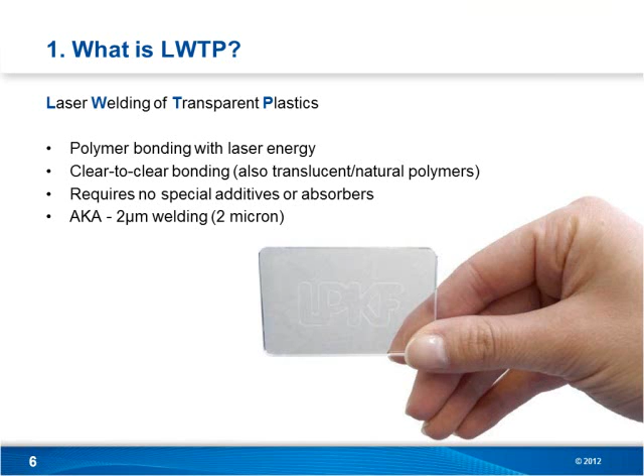So you might also hear us refer to this form of laser welding as 2-micron welding. That has to do with the wavelength of the laser. It's a higher wavelength. Or you could hear us refer to it as laser welding of transparent plastics. So there's a few names going around, just industry lingo, as this new technology kind of finds its traction in the industry.

In comparison, today we're talking about LWTP. In the past, though, you may have heard of through transmission laser welding. The real difference is in the wavelength of the lasers. As you can see, through transmission laser welding typically deals with near IR lasers between 800 nanometers and 1064. As we get into this new type of laser welding of transparent plastics, we're looking at higher wavelength lasers, sometimes double the wavelength, up to 1500 nanometers through to 2000 nanometers.

So again, 2000 nanometers, that's 2 micron, and that's the correlation, that's where you'll hear us say 2 micron. You might hear Tony say fiber lasers, that's what we're talking about, it's all the same. Again, the big difference here is that we're doing this without absorbers.

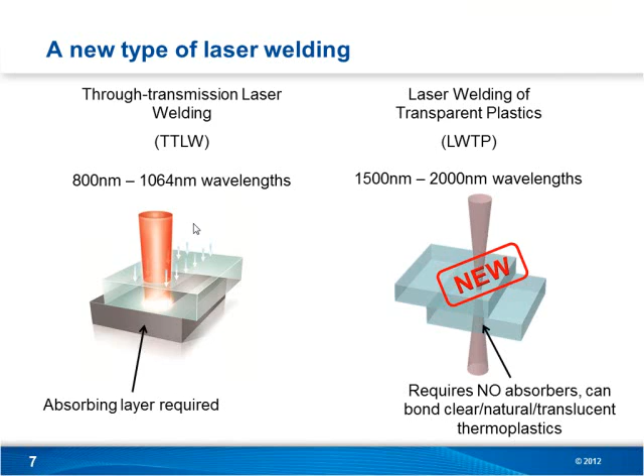What we're talking about today, however, is we're looking for a little bit more inherent absorption of the laser.

So the plastic is still in its natural state, but we want to have the ability to absorb some of that laser radiation into the plastic. Once you get up above 1500 nanometers, the laser wavelength starts to react differently to the thermoplastic.

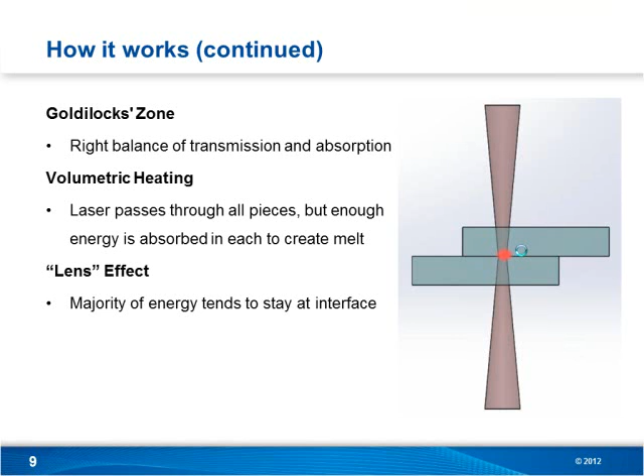So what do you need in order to make this happen? Well, like we mentioned before, we need a laser with wavelengths greater than 1500 nanometers. Typically, and Tony will attest to this, we're going to see lasers more around the range of 1900 nanometers. That being said, you saw the chart—we can play with wavelengths. Anything above 1500 though, and we're going to get the absorption that we need to weld plastics without additives.

Also, we need two or more clear pieces of plastic. The reason I say or more is because we have the option to bond more than one layer with this method. You'll see some pretty cool pictures, especially one that Tony's done down at IPG. I'll let him talk about that though.

Now, I want to clarify something. When I say clear, I might say clear, natural, translucent, or transparent—any of those will work. Most thermoplastics in their natural state are going to be clear or translucent, but there are some plastics like PBTs or nylons that even in their natural state have a milky or cloudy color. That still applies to the technology we're talking about today. That means the plastics don't have to be perfectly clear, just in their natural state.

We also need clamping force and material compatibility. So if we're welding two dissimilar pieces of plastic, we need the melt temperatures of the two pieces of plastic to overlap somewhat. They also need to have similar surface energies and similar chemical makeups.

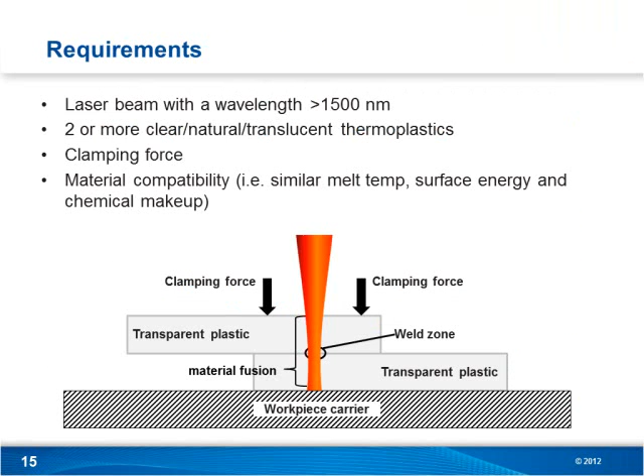We're controlling the laser beam with two galvo scanning mirrors for the most part. This is how Tony would be doing it in his lab down in California, and this is how we would do it in the lab we have set up at our German headquarters in Garbsen. Basically the laser beam is controlled with a galvo scanning mirror, so we can set up contours in software. The software pushes the information to a PLC, which controls the mirrors, and we can drive the beam in an XY motion pretty flexibly.

Typical travel speeds, we're seeing 20 to 80 millimeters per second as working travel speeds, but different than through transmission laser welding, where a lot of times we're making multiple passes. Here we're usually making a single pass, maybe 2 or 3 at the most. For the most part, a single pass can usually handle what we're looking for. So even though the travel speed might be slightly slower than regular through transmission laser welding, because we're only making 1 or 2 passes, it's still a very fast process and absolutely adequate for production.

Yeah, you're quite right, it is material dependent to a certain extent. Sometimes 1 pass is fine, other times you might need to heat it up rather more slowly with 2 or even 3 passes.

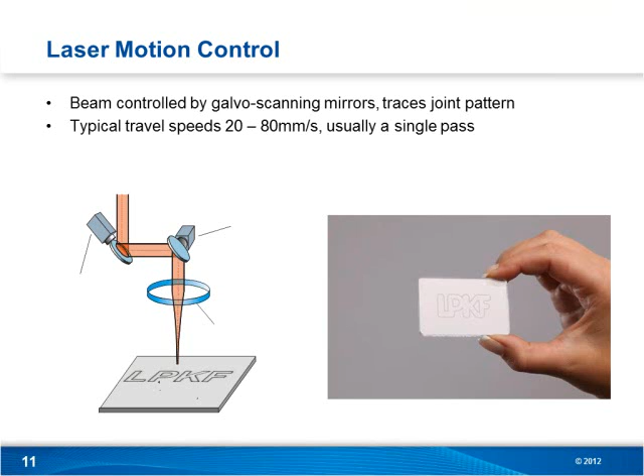So why is this a big deal? Why are we even talking about this today? And what are the influences going to be for you guys, for the industry, etc.?

So really the big difference here is that we can now weld plastics without any absorbers. When I say absorbers, I'm talking about whether that's an absorber like Clearweld that allows the plastic to remain clear, or if you're talking about adding pigmentations like carbon black to the lower layer. If you're familiar with regular through transmission laser welding, commonly the lower layer had to be black or of a darker color, which allowed the laser to be absorbed into that part. That being said, we don't have to have that anymore. Now we can weld 2 plastics without these absorbers. So this opens up possibilities for new laser entry, new joint designs, and also for color combinations.

Beyond that, we can do multi-layer applications with films. And it doesn't even have to be films. We've done hard to soft, we can do hard to soft to hard, and you'll see a few examples of that here in a minute.

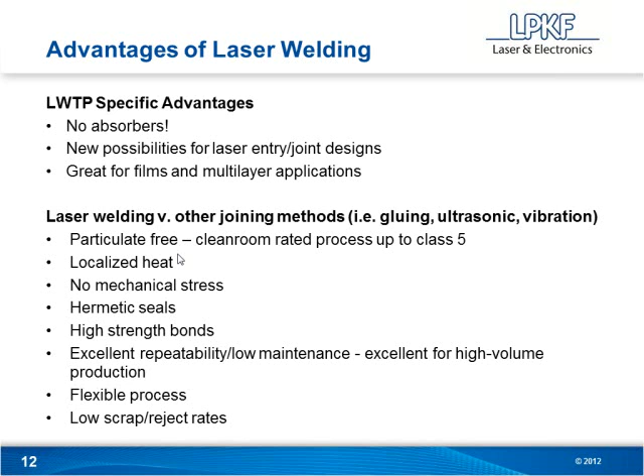Just really quickly too, the laser welding family, which is laser welding of transparent plastics, LWTP or 2 micron, like you've heard us say, that all falls under the laser welding family. Those all share these advantages: particulate free, it's great for clean room environments; localized heat, we're really only applying heat where it needs to be, and we can do this very precisely. Opposed to ultrasonic welding or vibration welding, we're not going to be stressing the parts too much. And on down the list, there's a lot of advantages to laser plastic welding, and those all still apply with LWTP laser welding as well.

So the big deal about no absorbers: one, specialized absorbers can be very expensive. Obviously, if you dope them into the plastic, they're going to be more expensive, but if you apply them locally at the joint, which we see a lot in production before this technology existed, it's difficult to apply and it can cost a lot to figure out how to do that. So now that we don't require these absorbers anymore, the cost of welding 2 clear pieces of plastic is going to be significantly cheaper.

And then also on top of that, even though these absorbers allowed the plastic to remain clear, they still had some effect—you would see this greening effect of the plastic, it wasn't completely clear. But I think for the medical industry and the biotech industry, the big one is going to be the FDA certification process. No longer will you have to push through another additive or another material to the FDA. Now you're just saying, hey, we're welding 2 pieces of clear polycarbonate together. We're not adding some obscure special chemical that no one's ever heard of that has to go through this process. So this is huge from a standpoint of simplifying the certification process as you pass medical devices into the FDA certification program.

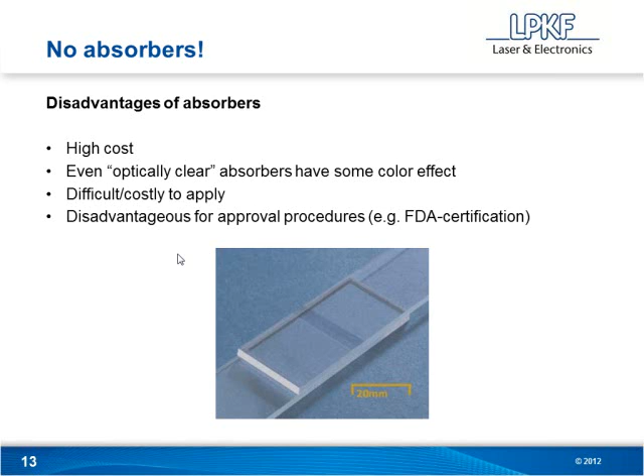Kind of leads us into my next topic here, which is industries. The big ones that we see are medical, biotech, and consumer. That being said, there's going to be applications outside of these as well, but the one that we're really excited about is medical, and obviously biotech is a subset there.

You'll see applications like microfluidic devices, as you can see here on the bottom. Very small channels require precise welds. Well, we can do this now, again, without having to add any specialized absorbers. Catheters and tubing situations - Tony's even been playing around with welding, making butt welds, which is a pretty important improvement, and we'll talk about that a little bit later too.

And then bags and connectors, and then you see the biotech in regards to that, flasks and cell cultures. So in consumer, we feel like it'll catch up eventually. There's a lot of potential here, mostly for aesthetics and design elements, playing with different color combinations, allowing us new joint entries, etc.

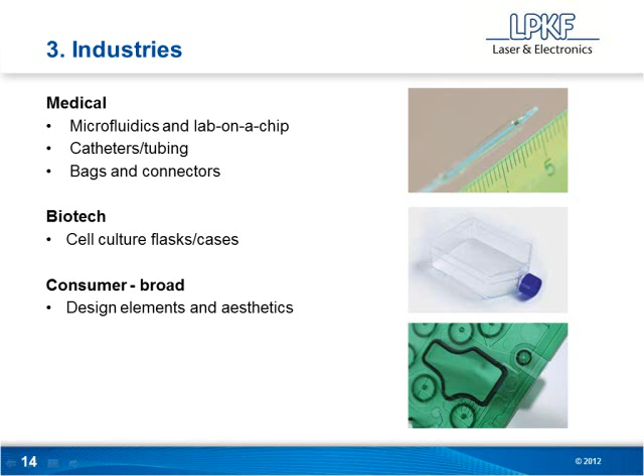So notable materials - we're going to kind of jump into the materials section and applications. I might go back and forth a little bit, but these are notable materials for LWTP, and again, this is not all of them, just the ones that we've seen have the most traction so far. A lot of these you see in the medical industry: polycarbonates, acrylics, COPs, COCs, and then obviously flexible materials like TPUs and TPEs. We're seeing a lot of applications with those.

Tony, have you ever seen any plastics to add to this list as far as popular plastics? No, I think you've pretty much covered the main groups there. I think obviously as the polymers become co-polymerized, there are many different mixtures of polymers, and there are requirements to substitute for PVC and for polycarbonate. We're seeing lots of blends of different polymers that are all really quite weldable as well, apart from the basic groups that you have on the list there, Josh.

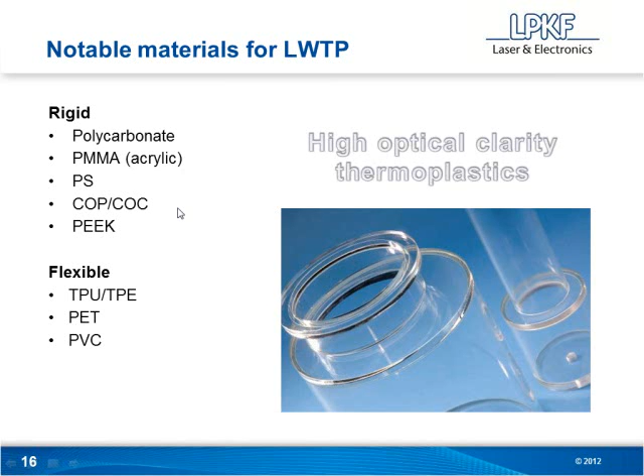So let's jump into a few applications, and these are just different material combinations that we've put together. A lot of these we're really just testing. Some of these took place in our lab in Germany, and Tony will show you some applications and materials he's welded in his lab down in Santa Clara. In this case, we have just 2 PMMA foils, pretty thin, 250 micron thickness, and I have a little animation here. Again, you just get that volumetric heating through the part, so the weld zone's actually taking place throughout both pieces of plastic.

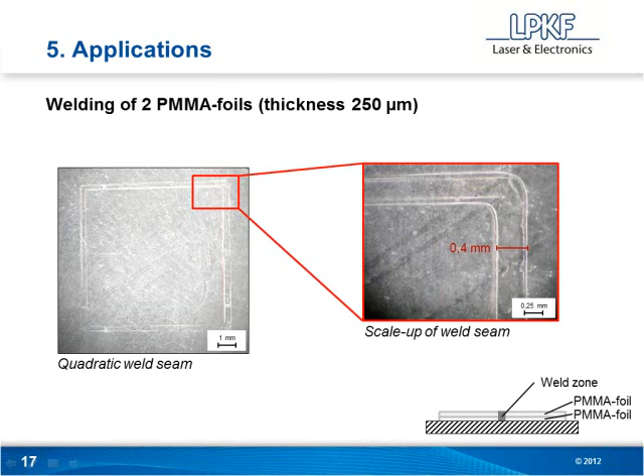Again, multi-layer and foil stack-ups - in this case we had 4 polyurethane foils. We actually have a couple more exciting slides here, but I'll let Tony talk about those ones. We've done 4, I think we've done a few more than 4 in our lab, but in this particular instance, it's just proving the concept that we can weld multiple layers.

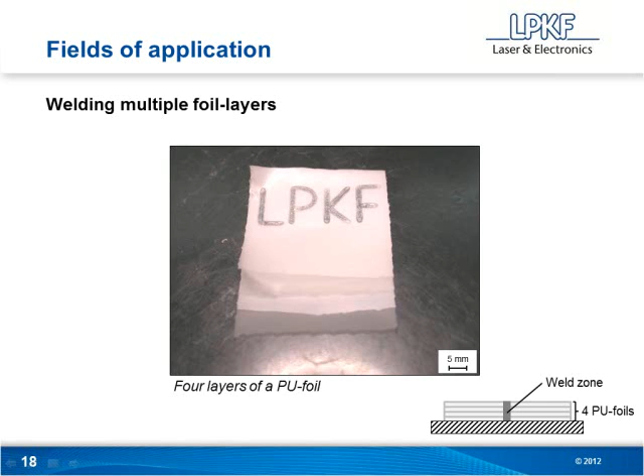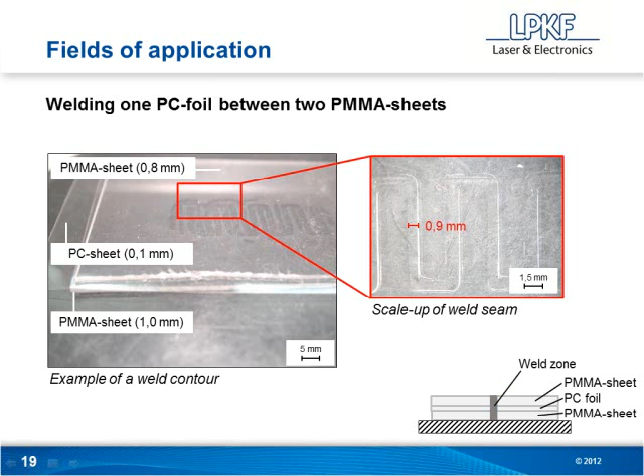Here's one where we have PC foil, so a relatively flexible foil with 2 PMMA sheets above and below it. All different thicknesses, and these are all weldable together - again the volumetric heating effect that you see with this type of laser welding. You can see a scaled up view of that, nice, very clean weld seams. It looks really good, you can't tell a huge difference between the clarity of the seam and the plastic itself. So again, aesthetically, it's a very pleasing weld seam.

COC foil, like I mentioned, these are gaining a lot of traction. 150 micron thickness, and this is actually a microfluidic sheet, which opens up another realm of possibilities for microfluidics. Essentially what's happened here is the lower sheet, the COC, you can see it has channels basically etched into it, and then the COC foil is laid on top of it.

And what's happening is as the weld is taking place, you're left with these reliefs or these channels, and it does a very nice job of this. That's because the laser doesn't necessarily have to travel perfectly on the outside of the channel. We can actually overlap it a little bit, and you still have this nice clean edge where the channel takes place because we don't have any absorption at that point.

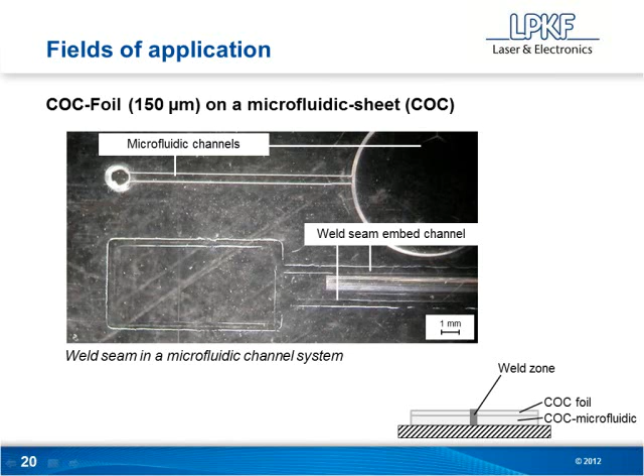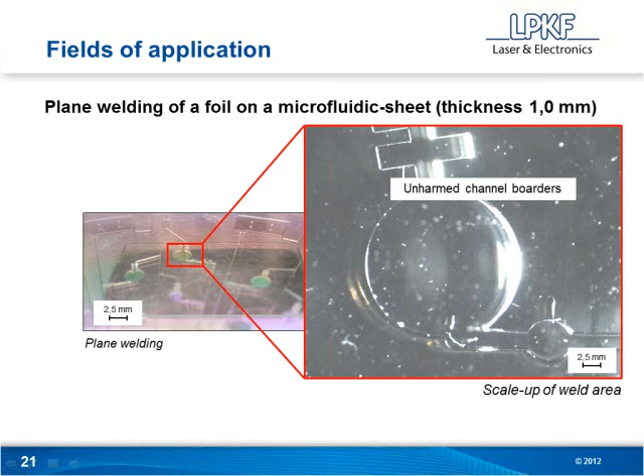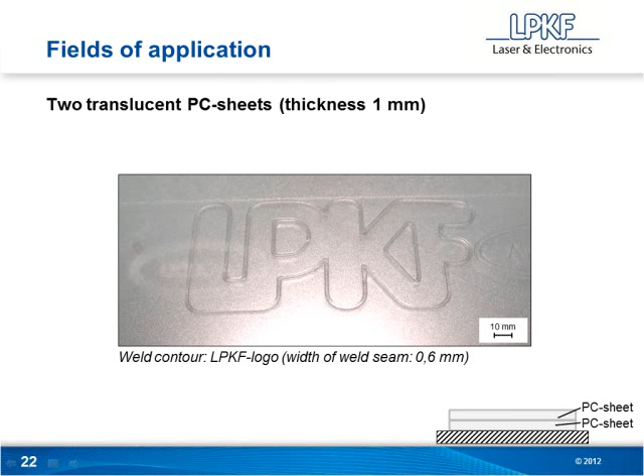This particular slide, I want to show the difference between clear plastics, translucent plastics, and transparent plastics. So they can all be welded. In this case, we have a translucent PC sheet, so it's a little bit foggy, but absolutely weldable with TLPW. And then in this case, we have a high transparency PC sheet. So again, as long as it's a natural thermoplastic, it doesn't matter if it's translucent or transparent, we can weld them.

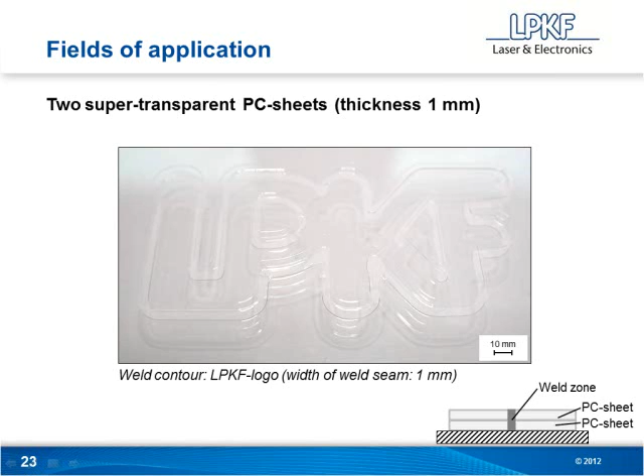This is showing an instance where we did a pull test on that high transparency PC. So you see the material breakout in the weld seam. This is good news. That means we created a bond in the polycarbonate where it's not just surface tacking. The two pieces of plastic actually fuse together, and as we pulled them apart, you see all the cracking and micro fractures, and that lets us know that we've actually fused the two parts together.

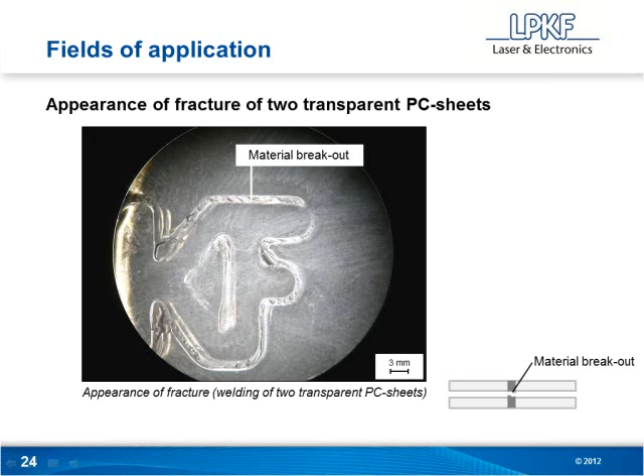This is actually a test that we ran. Tony, I believe you guys ran this one in your lab, but what we're looking at here is clear to black, and why this is interesting is because that lower black layer, although it is black, it is actually transmissive to the laser. So any laser you shine on this black part would pass right through it, except the higher wavelength lasers will get some absorption. It's dyed black rather than filled with carbon pigment, and that allows the laser to pass through it.

This being said, with the 2-micron technology, what we're able to do now is we could theoretically bring the laser in - and I believe we did this in this case - from the black side and still weld these plastics together. So the laser would be passing from the black through to the clear. This opens up possibilities. We've had a few requests for this, or at least more information for automotive lighting, where you're limited on the colors of plastics you're trying to weld together. So again, this is what I was talking about as far as color combinations and joint designs. We're opening up a lot of opportunities for how we can approach these now.

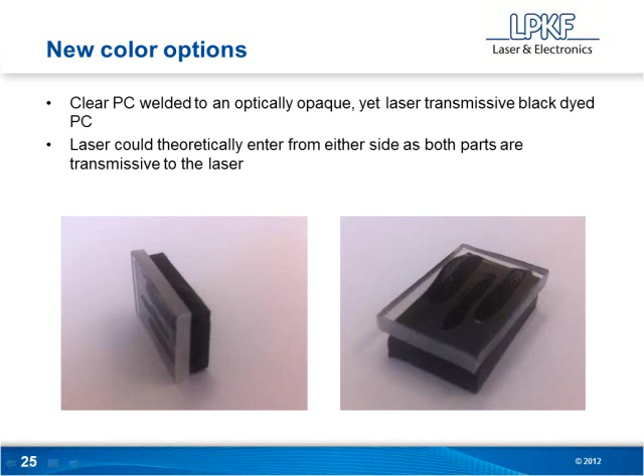So Tony, that brings me to you. I think you got a few slides here, so I'll just let you take the reins.

I just wanted to point out that we manufacture the lasers and LPKF manufactures the systems. These long wavelength fiber lasers are very high brightness, single mode, meaning highly focusable. So for these polymer applications, where these are very big spots in laser terms, we can use very long focal length lenses or even collimated beams, so restricted line of sight access is really not a problem. Tooling and other components that sometimes get in the way are really not a problem with long focal length lenses. And the 120 watt power level - this is a unique fiber laser product, the only laser of this type available on the market with this very high brightness, high average power.

And to go back to Josh's discussion on this particular slide, we've shown welding up to 22 different layers of 0.1 millimeter thick LDPE. One reason I did this was because it actually shows the outline of the weld volume very nicely, and it shows that it obeys the classical Beer-Lambert absorption law as expected from first principles. It's also more recognizable as a welding process to those of you familiar with metal welding - it's a similar mechanism in that you're melting a complete pool of material and moving that through the material.

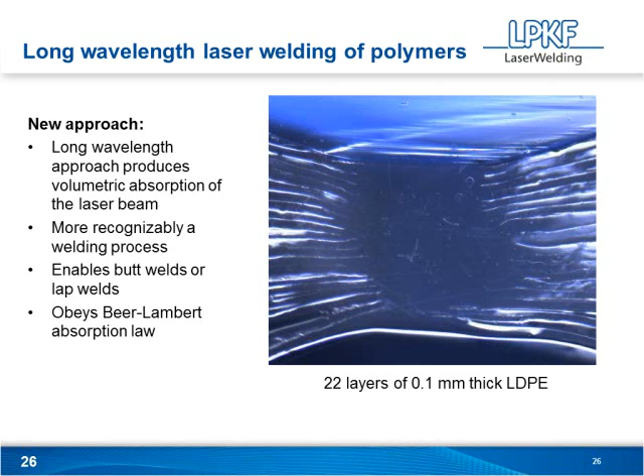So move on to the next one, please. Okay, this shows some of the similar micro-welding that we did here with our lasers, and sub-100 micron features are fairly readily achievable. We're seeing 32 micron, a couple of thousandths of an inch weld features. So that's why the microfluidics guys are getting fairly interested in this technology.

There's no other technique available for melting polymers in such a controllable manner. When I say controllable, I mean controllable both temporally and spatially. You can adjust the amount, the length of the pulse, and the amount of heat going in there down to microjoules and perhaps even nanojoules. So you can not only control the amount, but you can control exactly where that heat is placed. There's no other technique that allows you to control heating of clear polymers in this way currently. Ultrasonics, RF, none of these other techniques have this controllability of the process. That's why we feel that sometimes we're able to tweak the rules a bit with regards to material compatibility.

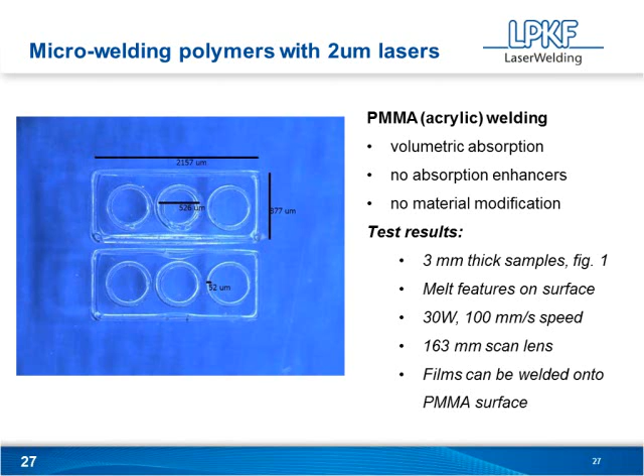And we have a couple of these applications now for butt welding type applications. Again, as Josh said earlier, part of the reason that we're able to produce these butt welds is because of the absorption at the interfaces.

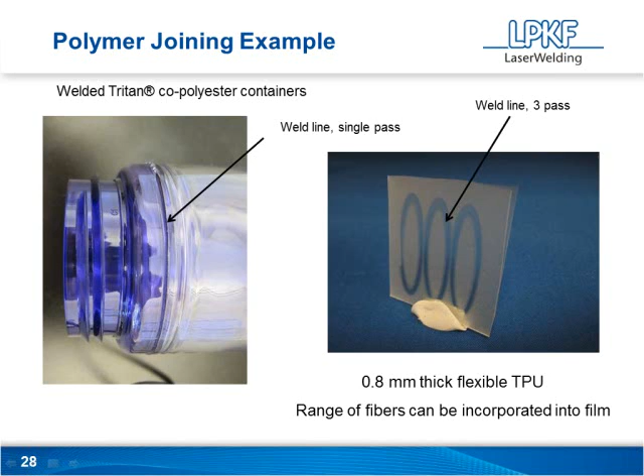And is that the end of my slides? I think so. Is it, Josh? Okay, yep, we're back to your slides now.

I just wanted to make the point that these are fiber lasers that have been built for some time now. They were actually initially developed for surgical applications, but we've known for some time that there are these commercial applications for polymer joining out there. So these are not completely brand new lasers. This is simply a modification of the current fiber laser technology, and they're commercially available off the shelf and relatively well tried and tested fiber laser designs. These are not research lasers.

Although due to the longer wavelength they're slightly more expensive than the conventional infrared laser, these lasers are very competitively priced with infrared lasers, perhaps 50% more costly, but nothing like the costs of some of the more exotic lasers used in industry, such as the short pulse picosecond and femtosecond lasers. We're talking a small fraction of the price of those exotic lasers. So that's really all I think I need to say on the laser side.

Josh, if we can go back to you. Thanks, Tony. I appreciate that. And kind of along the lines, okay, sorry about that. Yeah, oh, sorry. Okay, I think we got it.

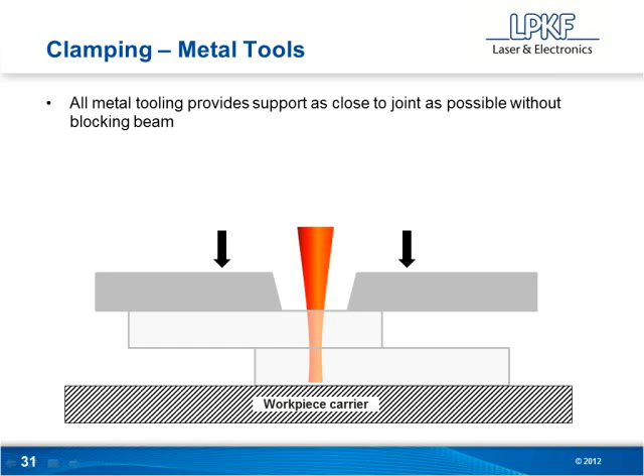Yeah, fiber lasers have pretty much revolutionized the laser industry for metal welding and cutting. With development of telecom technology in the late 90s, there were only a very small number of companies able to scale that technology up to industrial power levels. Interestingly enough, the first fiber laser wavelengths were in this mid-infrared regime, around 1540 nanometers. Having said that, the majority of industrial fiber lasers out now are in the shorter wavelength 1070 nanometer regime, because it's even easier to build a high-power fiber laser at that wavelength using ytterbium as the dopant rather than erbium at 1540 nanometers, or the thulium 1940 nanometer wavelength we're talking about here.

But yes, the laser beam is actually generated within the fiber itself. The resonator is created by forming two mirrors actually in the glass, by writing fiber Bragg gratings into the fiber, and then the fiber is clad and the pump diodes are connected into the fiber, totally hermetically sealed. So no free space optics at all, and hence no possibility for contamination.

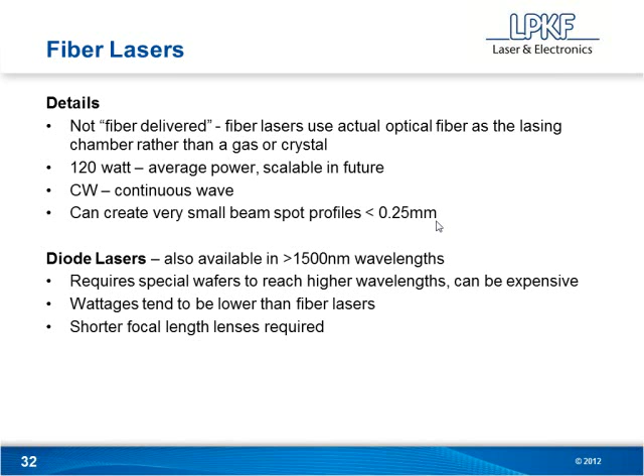Like Tony said, LPKF, we use IPG lasers in our systems, which is what we're going to talk about next - the equipment. That'll wrap up the presentation before we get into questions. We are using fiber lasers, and so we agree with Tony. There are diode lasers out there that can handle these wavelengths, but we feel that the fiber lasers have the greater amount of advantages to them.

So real quick, we're just going to cover the systems. The beauty of moving from regular through-transmission laser welding to laser welding of transparent plastics is that it's a very simple process. We can use all of the same equipment that we have currently, and all we're doing is swapping out the laser source. There's a few differences in the process, the way the part's clamped and handled, but other than that, the systems themselves, the control mechanisms, and all the safety involved, it's all the same. So it's a very simple process for us to move from our current systems to a system that can weld clear-to-clear polymers.

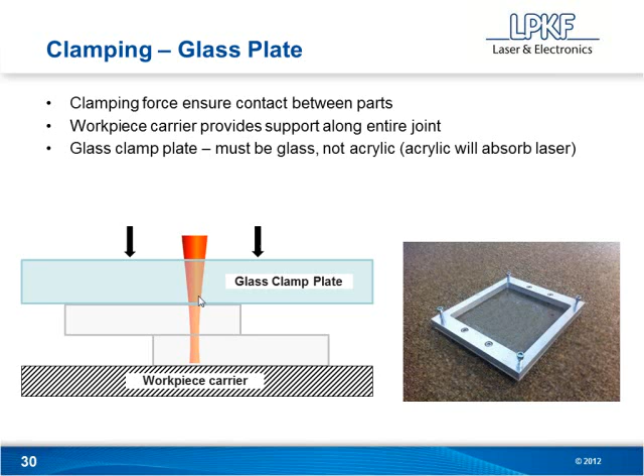Goes back to even our joint models here. Lap joints are quite simple, but as you start getting too thick, you're going to have volumetric heating through the whole part. There will be a point in time where you may not pass enough laser energy through to that bottom piece if you're too thick.

So it's material dependent. The one thing we haven't mentioned is that it's always very important to design for the process. You do that with every other welding process, and you design for this process. If surface heating is a problem, then you design the part such that it is no longer a problem.

But I think because people tend to be focused on through transmission laser welding, there's this assumption that the heating is only going to occur at the joint. If the weld is done properly, if the part is designed properly, if the tooling is done properly, it's really not an issue. It's like how most welds are done. Through transmission is the exception rather, and this is more of the rule. So there's a bit of a mindset that needs to be changed, perhaps.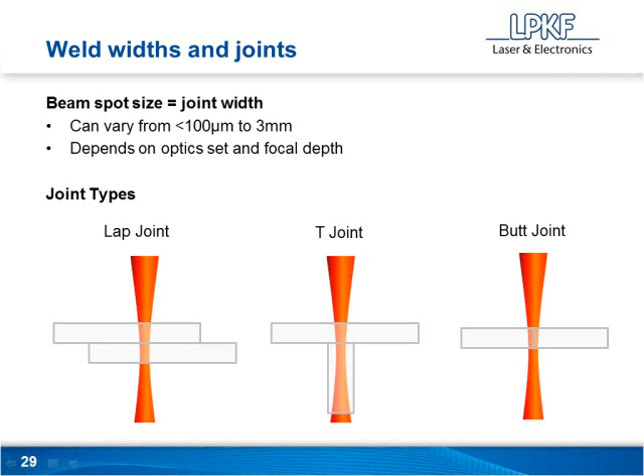Okay, thanks Tony. We're going to take a couple more questions, and if your question doesn't get answered, we'll follow up with you via email. I got a question from Thomas about the Goldilocks area we mentioned earlier, the 1500 to 2000 nanometer range where the PC absorbs the laser appropriately. He asks, is it a coincidence that all polymers absorb in that area? Is it the carbon-carbon bond that's vibrated?

As far as the bond, Tony, are you familiar? Yeah, there's some evidence that it's the third harmonic of the carbon-carbon bond that is generating some of this absorption. I think there's actually a lot of integration and scattering going on too, and I know some people have looked at producing a particular wavelength for a particular polymer. Our view is that at this 1940 nanometer wavelength, there's enough absorption, or enough acceptable usable absorption, in a wide range of commercial polymers to make the process valid. Further down the line, it might be necessary, particularly for thin films, to use a different wavelength to produce a joint.

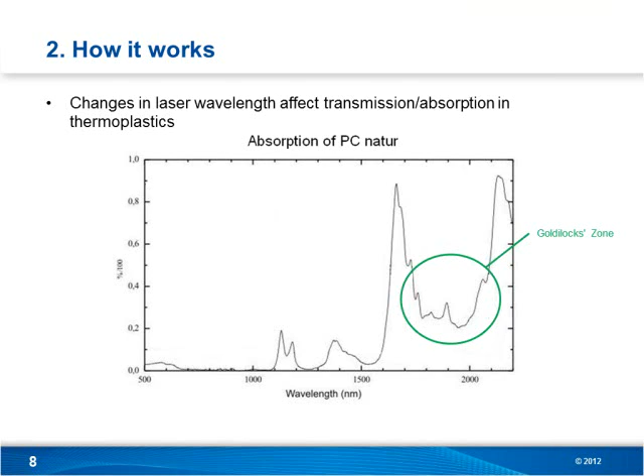One thing I wanted to mention before we jump off: Shane's going to handle our sign-off, but I wanted to throw this out. We talked about it a few times but never specifically mentioned it. The lasers Tony is talking about, his fiber lasers, the thulium lasers, are typically about 1940 nanometers. That's the range we found to be the most effective for the majority of thermoplastics. As far as commercialization of this technology, that's the wavelength that is, as of yet, creating the standard. So just so you know, although anything above 1500 nanometers technically applies to the technology we're speaking of today.

If we start running trials on parts for you, or if we're just talking about this technology outside of that, we're typically going to be talking about 1940 nanometer wavelength lasers.